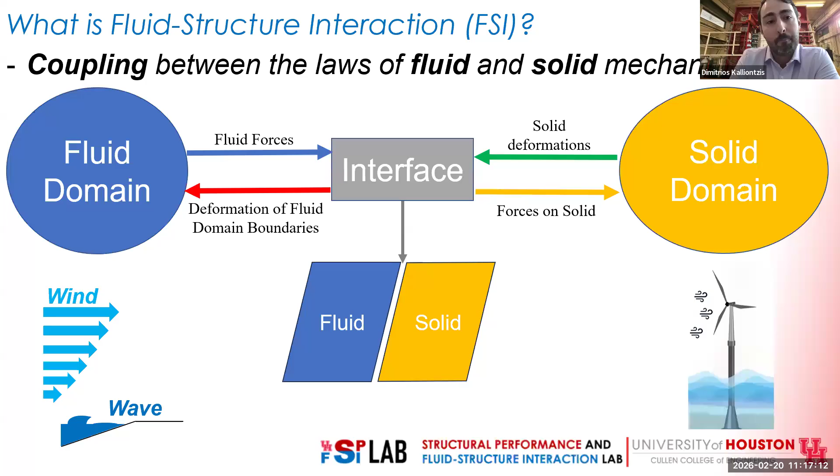Now, a lot of people would consider two types of fluid structure interaction. One is typically referred to as one-way, where basically the fluid domain gives information through the interface to the structure, but there's no two-way effect, so there's no feedback from the structural domain to the fluid. That is a general precept of what is a one-way FSI.

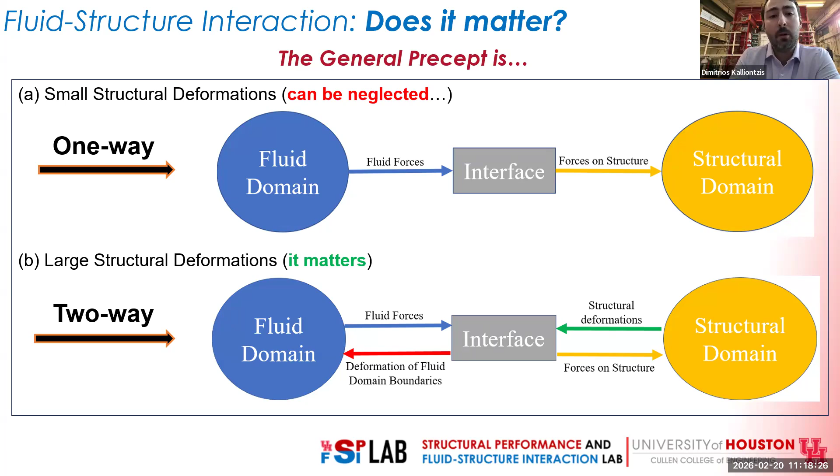It's typically used when we assume small structural deformations. You have a pretty stiff structure, whatever the structure is, and therefore you can in theory make this assumption that my structure is a bluff body, a rigid boundary. I don't have to transfer information to define my problem. And then when larger structural deformations occur, researchers would assume that this is a two-way phenomenon, where I do need to transfer information back and forth so that I can obtain an accurate estimate of the overall response of the coupled system. So these are just general assumptions.

Now, when it comes to fluid structure interaction, we consider several types of phase flow. So we have problems that we can call one-phase flow, where there's just a single fluid, let's say air, or just water, associated with a response.

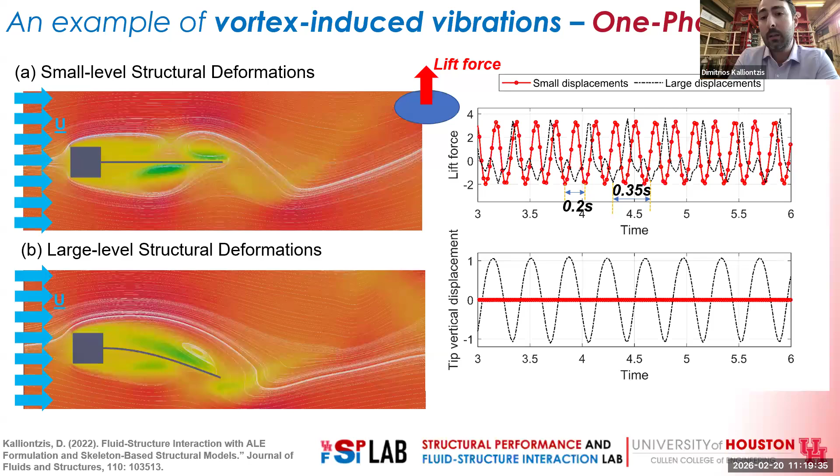I use an example of a vortex-induced vibration problem that is very common in literature, where you have cases with small structural deformations, the structure is stiff, the beam in this case is stiff, versus another case with large deformation. In a problem like this, which is a vortex-induced vibration, structural deformation will change the vortex shedding frequency. But in this problem, for example, the lift force that could be important in your analysis and design for the structure does not change significantly; it's still bounded within the same range. But if frequency is an important aspect of your design, then you should account for these effects.

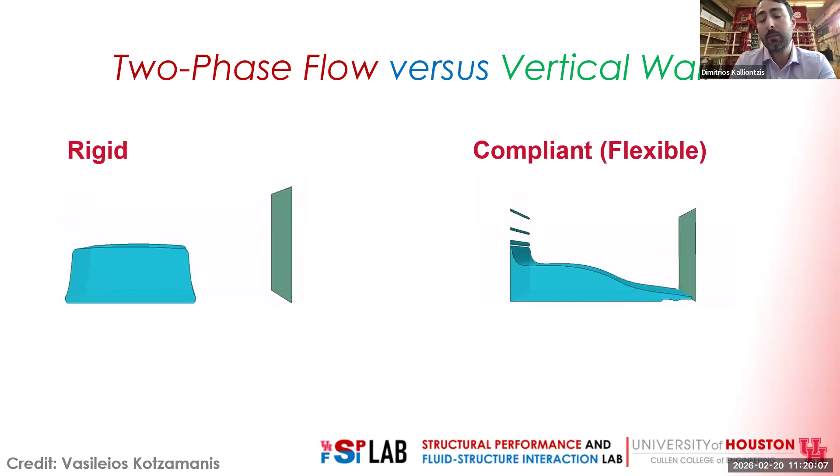There are also problems that involve two-phase flows, for example, when you have air and water. This is just a simple demonstration exaggerating the compliant or flexible structure, where you have a rigid structure on the left side. The flow basically impacts, rises on the structure, and then splashes back. In the other case, the motion of the structure, the deformation of the structure, does affect the flow. So this is a different class of problems, which I'm going to also talk a lot about today.

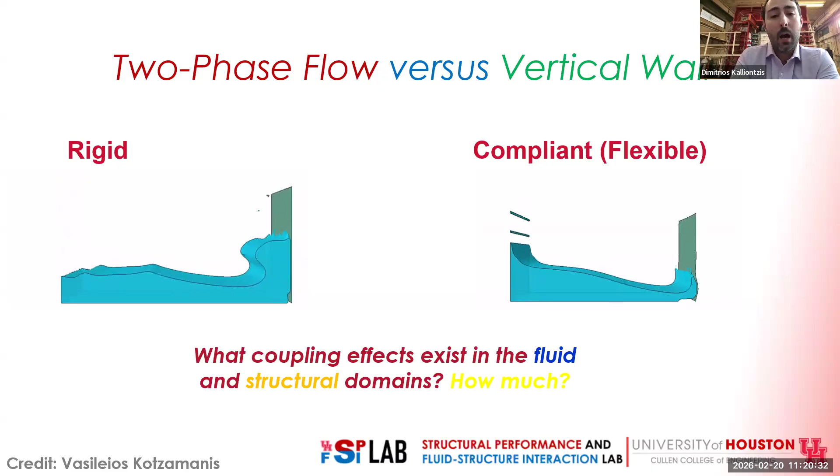We're going to mainly focus on two-phase flow problems. The key question in this type of problem is what coupling effects exist in the fluid and structural domain. As you know, many times we ask how important are they? And if they are important, by how much and in what terms? A more practical example of where this type of effect may manifest is elevated structures.

Especially at Florida and similarly in Texas, we are very much aware of the hurricane season, and that brings significant storm surge. After this type of events, we do see a lot of damage. In recent years, we have seen a lot of damage in these structures, which is why a lot of them are elevated one way or another.

So these structures, however, do experience sometimes significant wave impact on the first floor elevation because of the storm surge type that increases the free surface elevation significantly, so that waves can reach the first elevation.

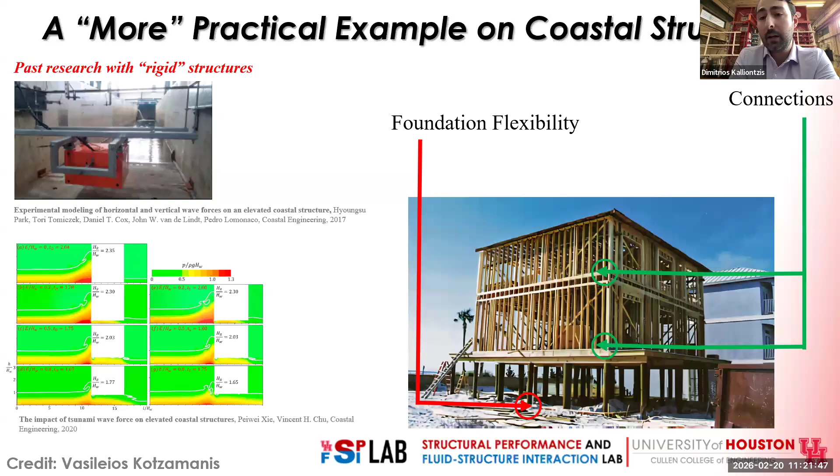And these structures are flexible inherently. They do have compliance that can come in several forms. One form is the foundation flexibility - how the piles are designed, what is the embedment length, what is the diameter of each pile, as well as the connections. The connection details can vary.

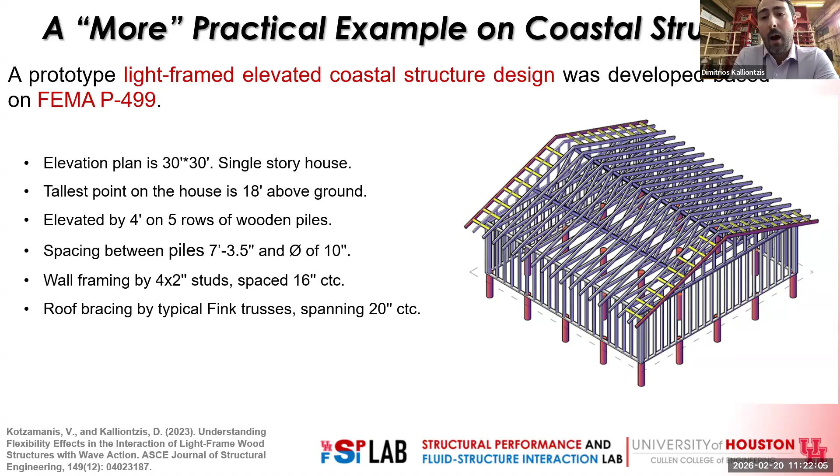To study these effects in this problem, we used a light frame elevated coastal structure, a typical design that was developed based on FEMA P 499, among other FEMA guidelines. We tried to see if waves hit the structure, and assuming different degrees of compliance and effects, how the behavior changes.

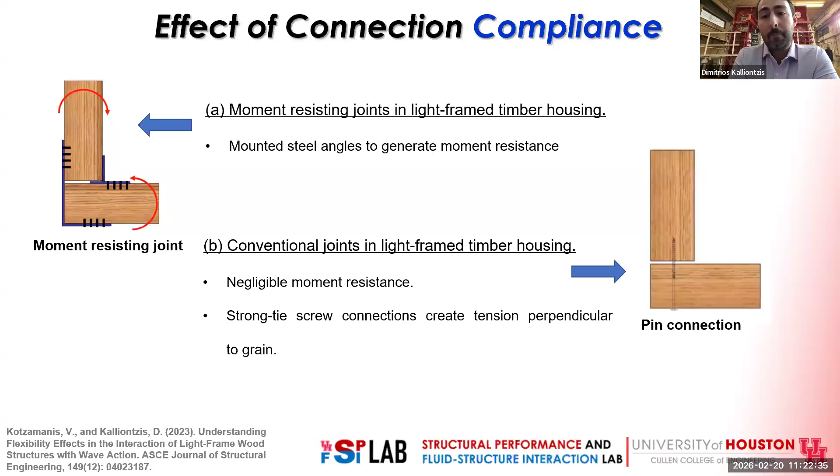So in order to incorporate the effect of connection compliance, we used two different types of connections. One is a moment connection - you can think about that as a more rigid or stiffer connection - versus a pin connection that is more flexible. The effect of soil compliance was also accounted for in this scenario.

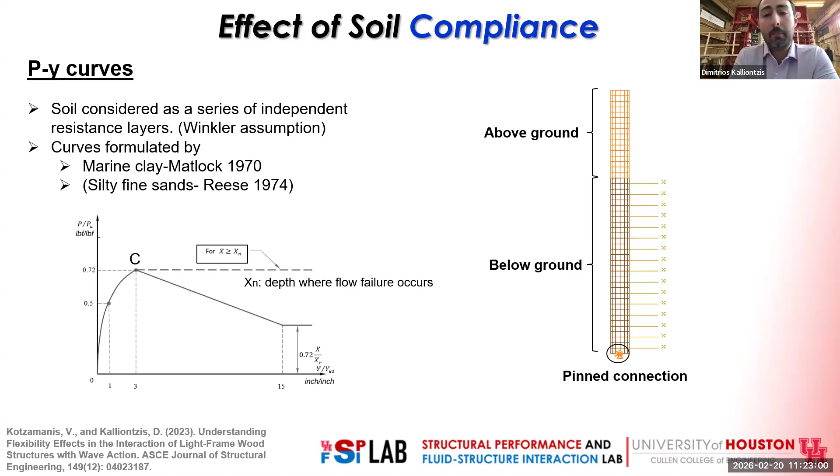I'm not a geotechnical engineer, so structural engineers for the most part would represent this behavior with P-Y springs. So we did, and we varied the pile design, as I will explain later, by changing the embedment and the pile dimension.

So in the first scenario where we accounted for the effect of connection compliance, what we observed basically is that compared to the rigid model, where the structure practically has the same geometry but it's just a bluff body, the deformations were of course more significant in the flexible structure, but also the contact forces the flexible structure experienced increased significantly in this scenario, by 55%.

In the meantime, the moment resisting connections also experienced slightly higher forces compared to the rigid model, but not as much, just by 7%. So the solution was much closer to the rigid body model.

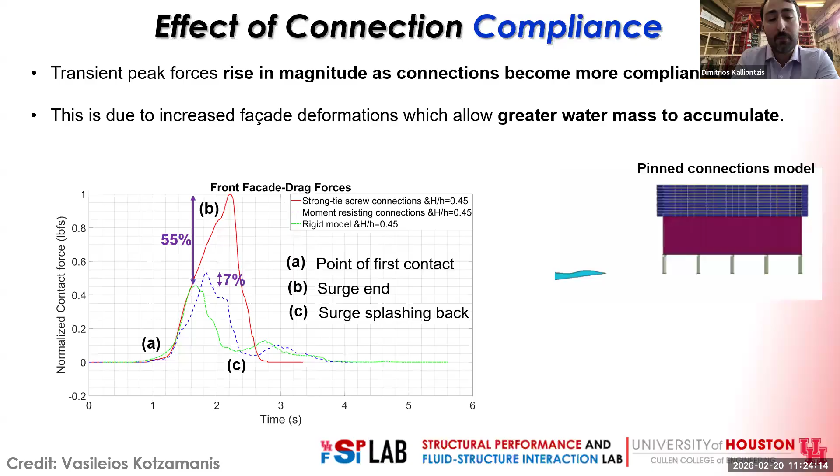What we also notice is when flexibility occurs in the structure, the interaction phenomenon is prolonged because the structure bends, so it allows significantly more hydrodynamic impulse to be concentrated in front of the structure and extends the impulse response, and also shifts the time where the maximum displacement and force occur.

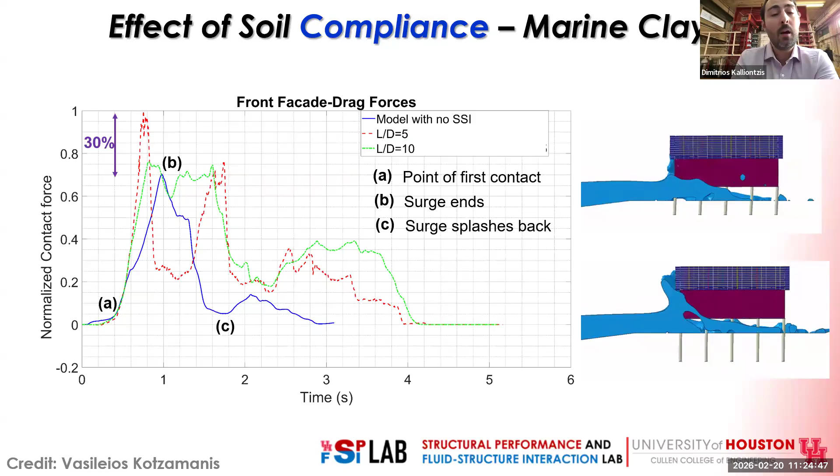In a similar fashion, we explored the effect of soil compliance by changing the design of the piles, basically by increasing or decreasing the embedment length of the piles, using embedment length to diameter ratios of 5 and 10. We also compared to the model with no soil effect. In this case, we did also observe an increase by 30% depending on the embedment length.

And this shows how the shapes of the response at maximum deformation were depicted by the model. I want you also to pay attention to the mode shapes that were observed, especially for the front elevation facade, because that is an important aspect that we decided needs further investigation.

Generally speaking, this type of shape, which in a way is similar to what you would expect in a simply supported beam, causes a deflection that will trap, in a way, more wave energy in front of the structure, which causes this increase in deflection and force.

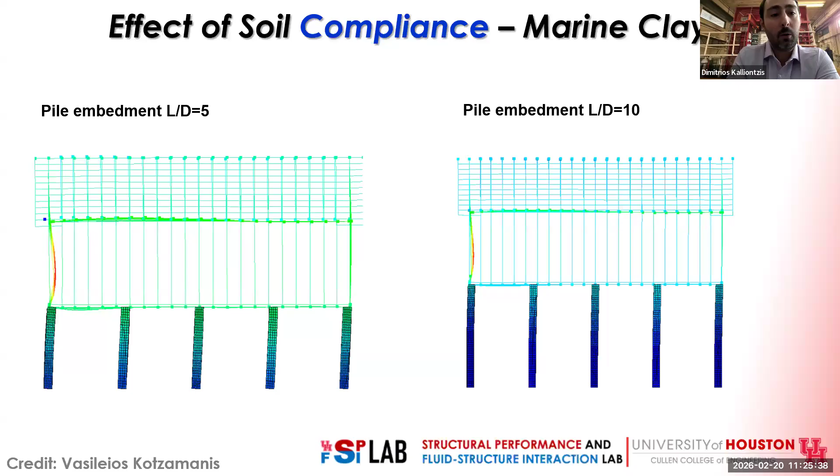So generally, in this small study, we did observe a prolonged hydrodynamic momentum transfer as a function of the compliance. We did observe a 50% increase in the peak force of the system. We did observe that soil compliance matters - so anyone who's a geotechnical engineer will be happy about that, in the sense that soil effects do matter in this case.

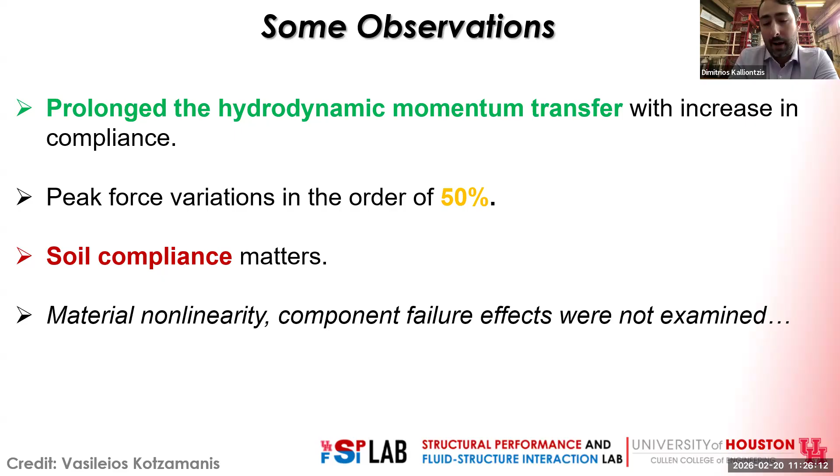Of course, this study was an initial study where we did not account for material nonlinearities, component failure effects, and other aspects that, of course, will play a role in the behavior.

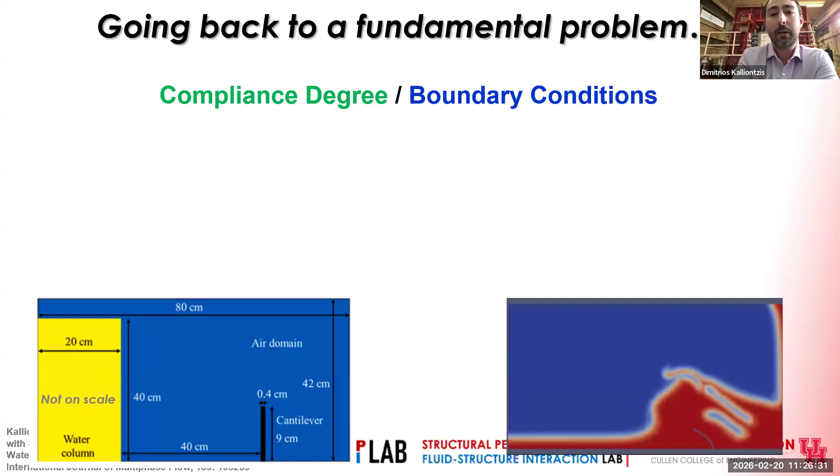Then after this study, we decided to go back to a more fundamental problem where we can study this compliance effect in more depth, but also incorporate another parameter of the boundary conditions. Boundary conditions were considered in our hypothesis very important because they do affect the stiffness, but they also affect the modal response.

A simple problem that could be used to study this effect is the dam break problem. It's a problem that has been studied significantly in the literature, used in validation of multi-phase flow models and structural models, and so on and so forth.

So we decided to use that popular problem in the study. Basically, as shown in the short video, it involves a water column that breaks—that's where the dam break problem gets its name—and then it hits a structure. In this case, the structure is a cantilever, with fixed boundary conditions at the bottom and no boundary conditions at the top. The structure deflects and interacts with the fluid.

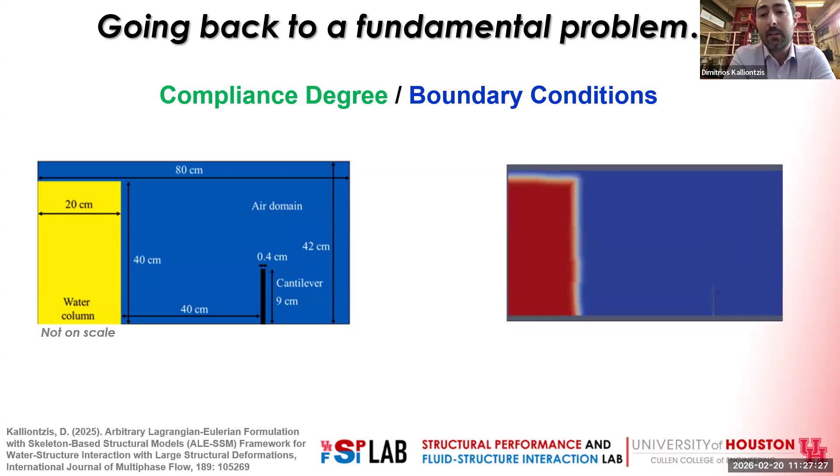Before we got there, we decided to develop a new formulation for this type of problem using what are called force-based beam column elements. Anyone who has used OpenSees in the past is probably familiar with this type of element. They're very popular in structural engineering because they reduce computational costs. You can generally simulate very complex forms of behavior with just a single force-based element.

We also decided to use an interface tracking method to simulate the fluid structure interface. That's a very important aspect in fluid structure interaction simulation because it defines how the two domains communicate. As you saw in the top part, that's a simulation from commercial software we did with a shell plate and a fluid domain flowing toward it. You can get what's called spurious fluid intrusion, which is not realistic—the fluid should interact with the structure, not penetrate it. This is a problem associated with how the interface is simulated.

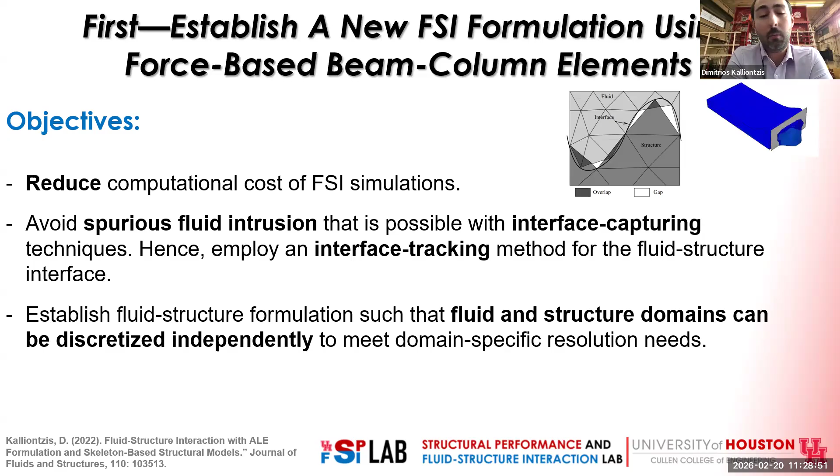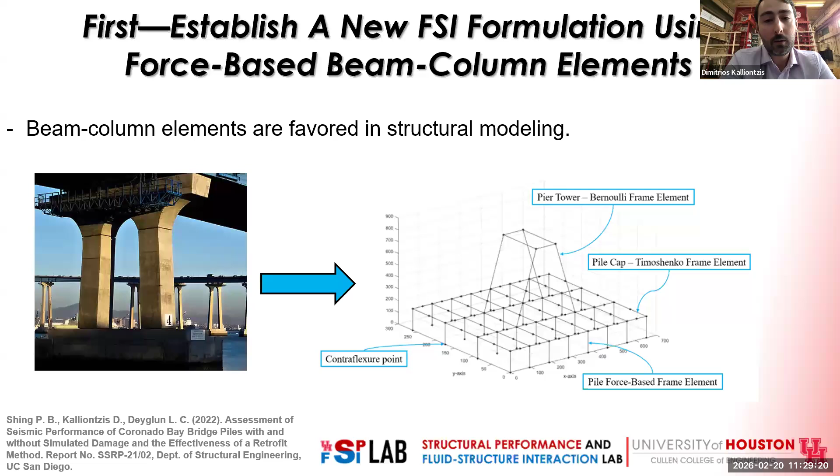Now, some background on beam column elements: they're favored in structural modeling because you can model big structures with just a few elements, and within a couple minutes get very reliable responses on big systems. This shows a bridge pier with a pile foundation system that was modeled as part of my postdoc at UC San Diego.

These elements are very simple—they have just two nodes, and you can vary the number of fiber sections depending on the problem of interest. There are many papers written on this topic. This is not a new element type; it's been out there for a while.

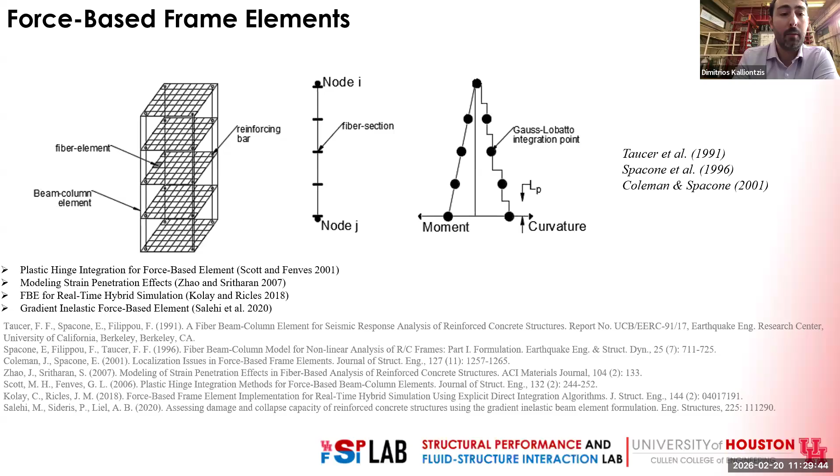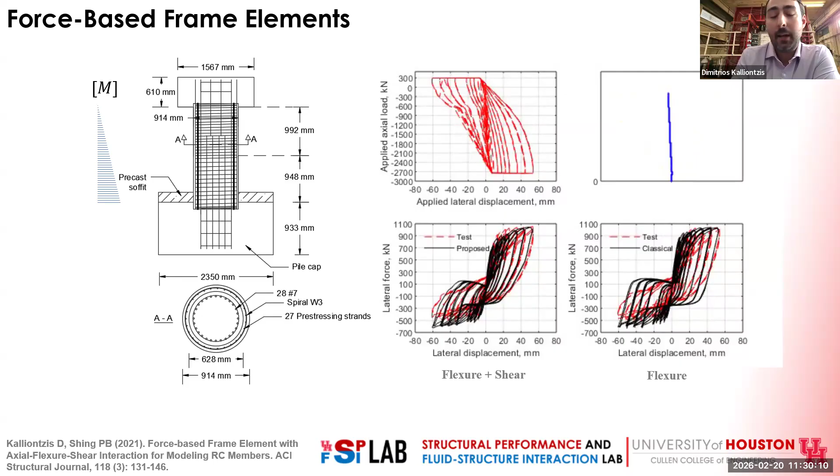For my part of the research, at some point I simulated axial load, flexure, shear interaction in a pre-stressed pile system using just a single element. You can see that just by using this type of element, the simulation can be very successful, even for very complicated responses that may take many, many days to run with more highly refined software.

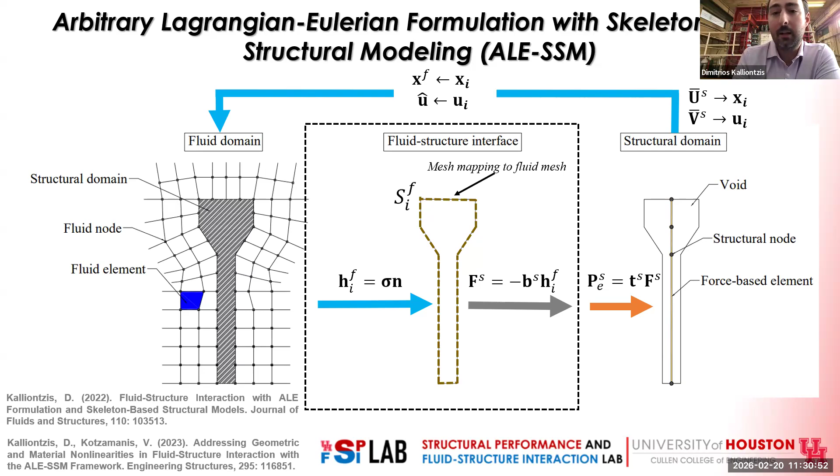The key in this type of problem is that since these elements are one-dimensional—they're line elements—how do you couple them with a multi-dimensional fluid domain? That's the key of what we call the arbitrary Lagrangian Eulerian formulation with skeleton-based structural modeling, which we developed to achieve this interface model. This accounts for an interface modeled in compatible form with the force-based element, allowing the use of these elements.

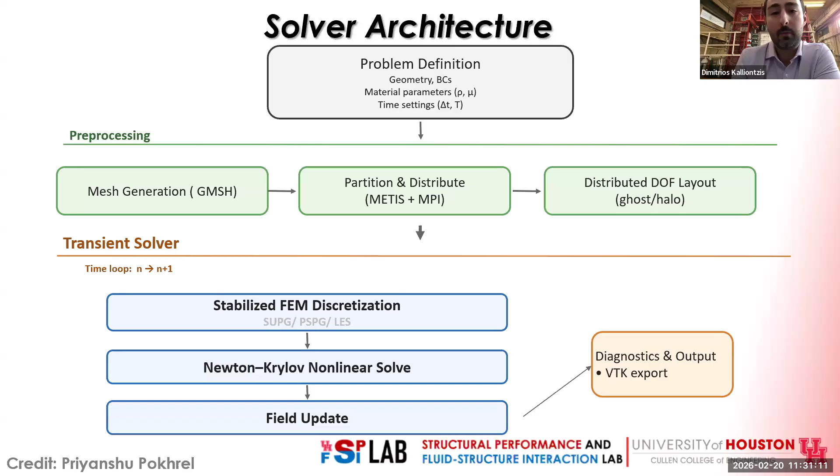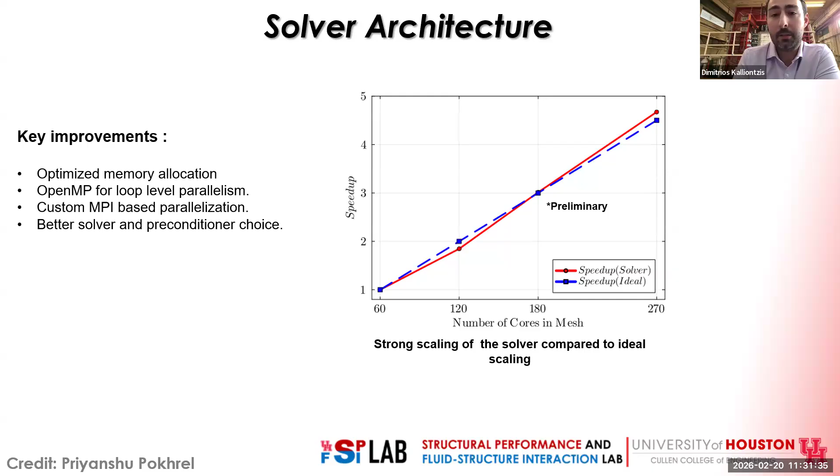For those who don't know, Julia is a relatively new platform, much newer than Python for example. So we had to do some more basic simulations to get data on the speedup of the code. Of course, we did a lot of benchmarking—this shows benchmarking on turbulent flow correlations that my student has done, and many other studies.

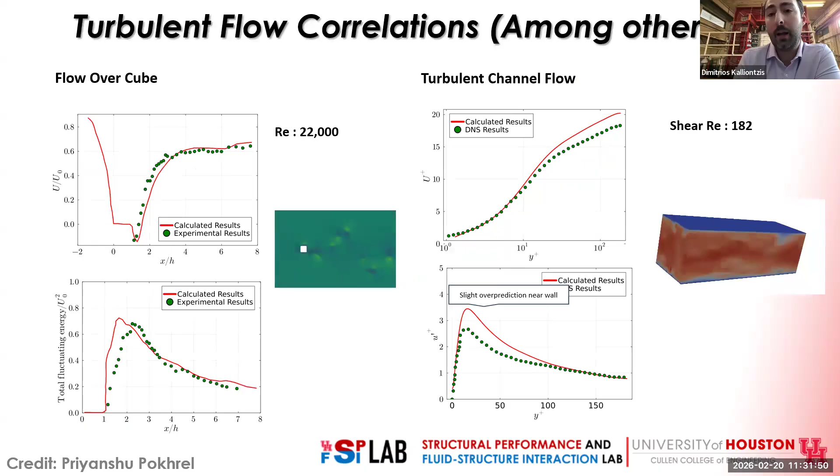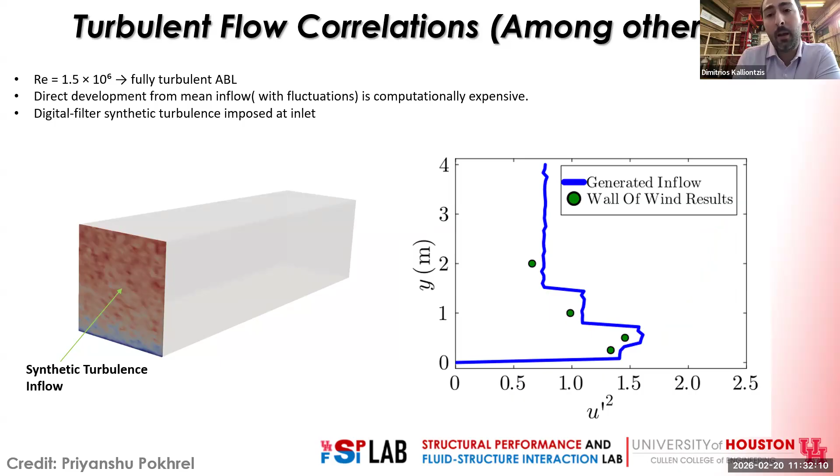So to look at how our software works—this is ongoing work my student has been doing on the wall of wind problem using this platform. I should say platform, not software, because it's not commercial, it's in-house developed. With that, I'll go back to the problem that we studied.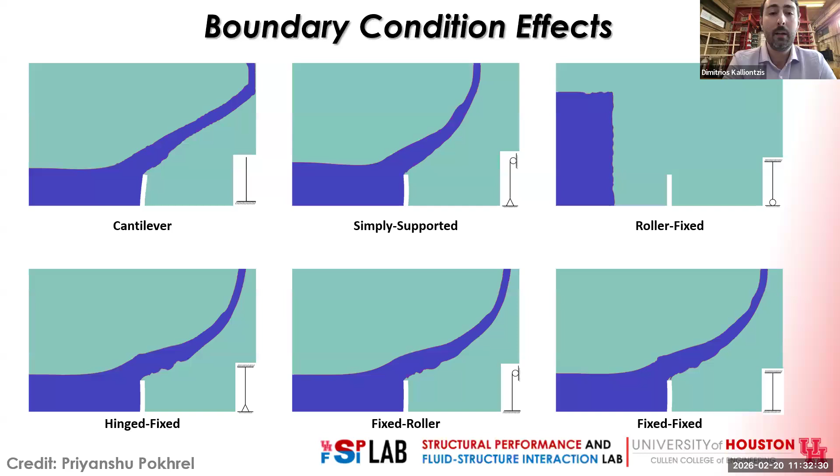We decided, as I said, to vary not only the stiffness in the simple problem but also the boundary conditions as much as we could. The possibilities here are limitless, but we decided to focus on six basic conditions, mainly related to cantilever, simply supported, combinations of roller with a fixed boundary, and a fixed boundary. So what did we observe?

We did observe that, as someone would expect, the more flexible, the more compliant the structure is, the larger the deformations. This is an expected response.

But when you look at the horizontal forces, that is a very interesting finding, because based on the initial findings we had, the more flexible, the larger the forces. However, here the boundary condition is significant. For example, the cantilever experienced the highest lateral drift, but it also experienced the lower horizontal force. So this is in a way counterintuitive based on what we saw in the beginning, but in fact it's because of the boundary condition effect.

When you have a cantilever structure, in a way the structure deflects so that it creates a pathway for the flow of the fluid to leave the structure and therefore experience reduced forces.

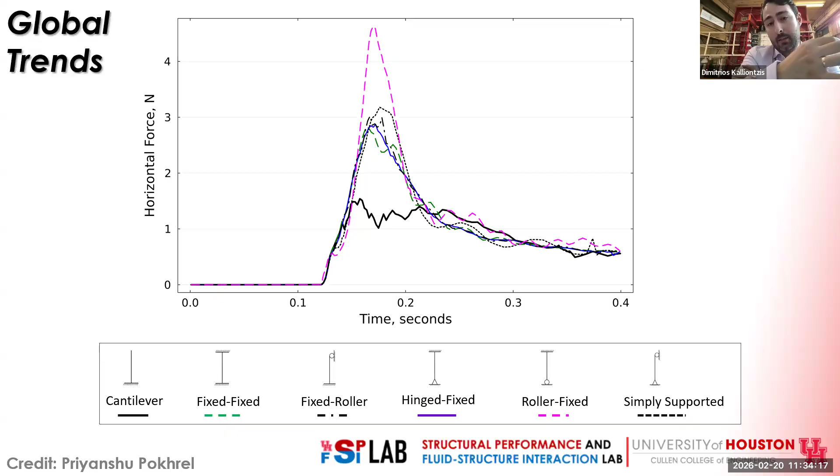When you have a simply supported condition or a fixed condition, even though you may have significant compliance within the mechanical properties of the structure, you in a way trap the wave momentum so that you end up with much higher horizontal force. In fact, the highest force was attributed to the roller-fixed condition, where the roller is placed at the bottom. As you can imagine, the resultant of the wave force is located near the bottom part of the structure, and so it results in much higher forces.

After that, we investigated other aspects, such as the sensitivity to stiffness. As you increase the stiffness, all the results converge to the same solution, as expected.

This is the peak vertical force that we observed in this case. Interestingly, when you have a roller fixed at the top and roller support at the bottom, the structure experiences a vertical force that decreases with the stiffness.

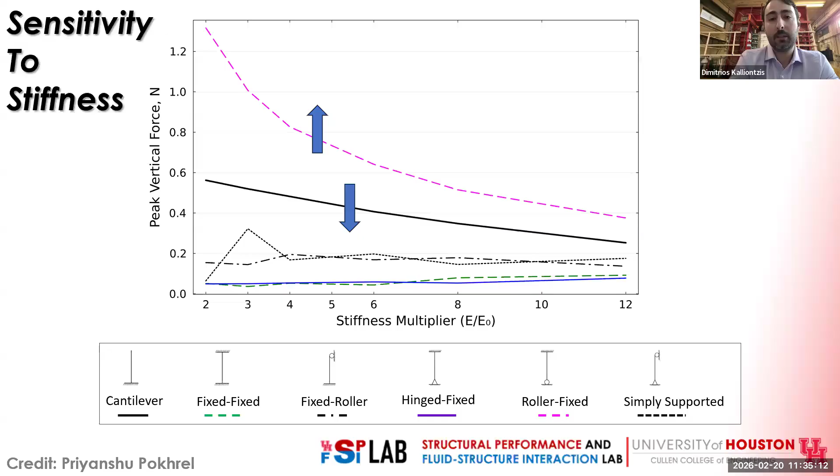When you have a cantilever, the structure, as it deflects, basically hosts the fluid on top so that it experiences a vertical downward force. So in both cases, there are some vertical forces in the structure depending on the level of deformations.

Then we also looked at some aspects of the fluid kinetic energy, how it varies in front of the structure, and whether it matters. Most structures experience very similar responses.

The cantilever was a little bit different, with some prolonged fluid kinetic energy, mainly because it created this pathway on top of it, allowing more kinetic energy to stay within the neighboring elements of the structure for longer periods.

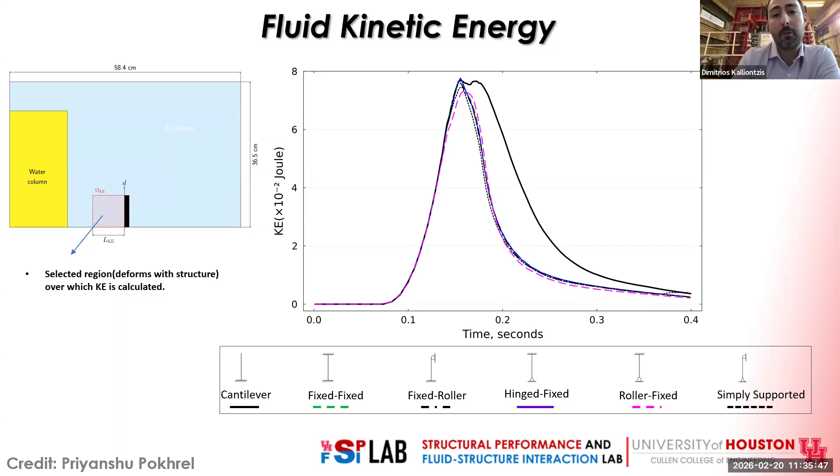The modal analysis that we performed in terms of force, and we also have results for displacement, showed that, depending on the boundary conditions, you have different modal participation in the system.

If you look at the right side, which is basically the force exerted by the fluid on the structure, fluid forces, as you can imagine, can be scattered significantly. The profiles of pressure they generate are highly nonlinear, and that also reflects on the modes they try to excite.

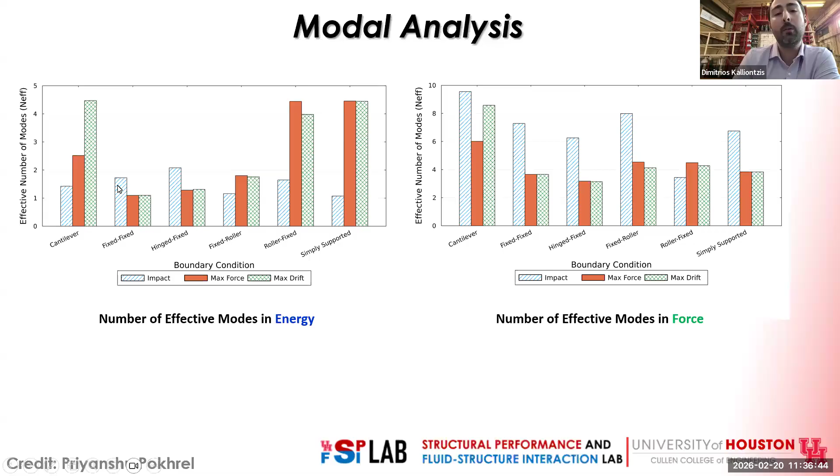The impact phase, for example, shown in blue, tries to excite a significant number of modes. The structure typically responds within the first two modes at impact, and then depending on the level of deformation, this participation of modes may increase.

One other aspect I'm also very happy about is that this framework we developed was then utilized by the NHERI Lehigh facility in order to perform real-time hybrid simulation. The collaborator is Dr. Jim Ricles and the student Faisal Nissar from Lehigh, who helped me and then led this work in order to integrate the two frameworks.

Of course, when it comes to fluid structure interaction, anyone who has done CFD analysis realizes that it's very time consuming. So the key question is how can you even consider real-time hybrid simulation?

Well, we were able to achieve that through several aspects. One was related to the ALE-SSM and how it is formulated, which allows, through force-based elements with very few nodes, to achieve real-time hybrid simulation by training the fluid forces through a neural network. That's the key that allowed this behavior.

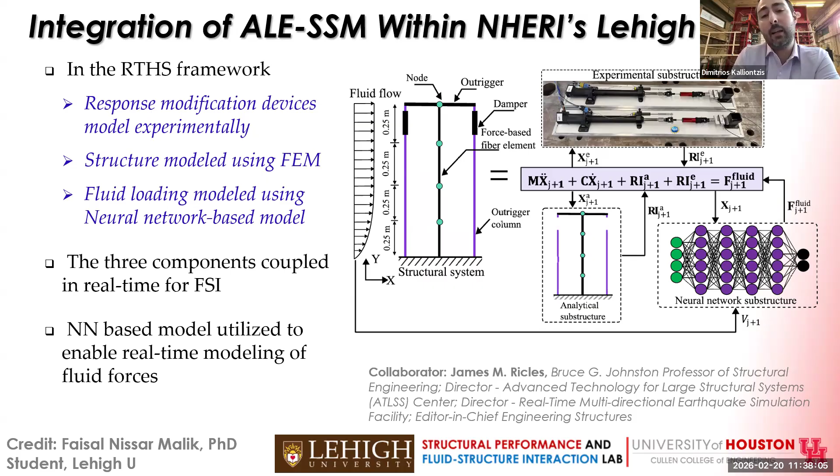In this case, we had the benchmark problem with one cantilever structure and a damper system that was represented experimentally. These are just some results of this problem. In this case, we accounted for one-phase flows.

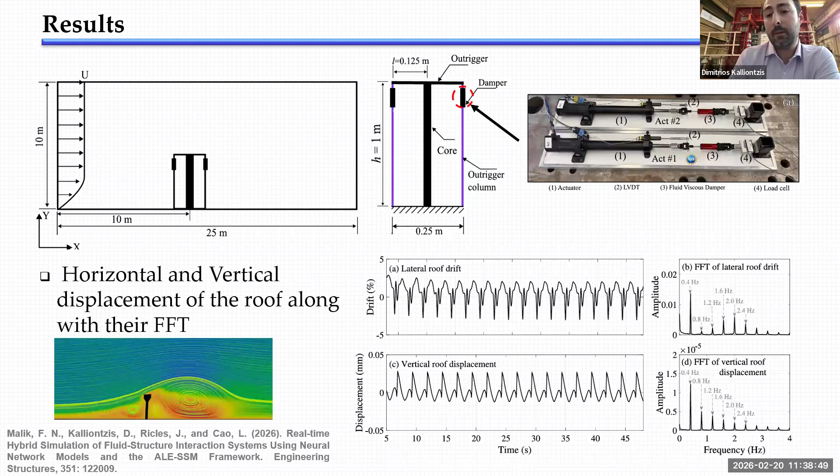We just wanted to do a first benchmark, but the significance of this problem, even though it is relatively simple, does result in excitations that span significant frequency ranges, which was also an aspect we wanted to verify works through a real-time hybrid simulation, because in reality, if you are trying to simulate either a wind problem or a wave structure interaction problem, you should expect a significant range of frequencies. So the question was, can a system like that in real time capture that?

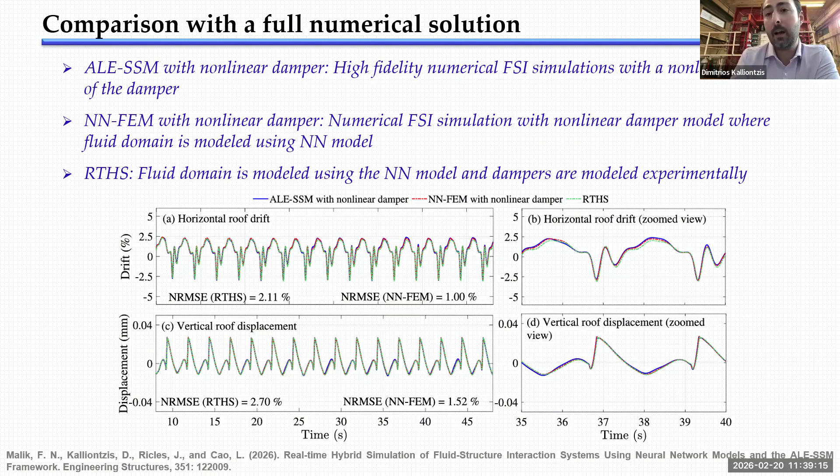The simulation showed that the original full fluid structure interaction solution matched excellently to the real-time hybrid simulation framework. And I want to emphasize that this happened in real time. It's a real-time hybrid simulation. It's one of the few times RTHS has been done for this problem, and we plan to continue this line of work. That was just a parenthesis showing how our framework can be extended to other usages.

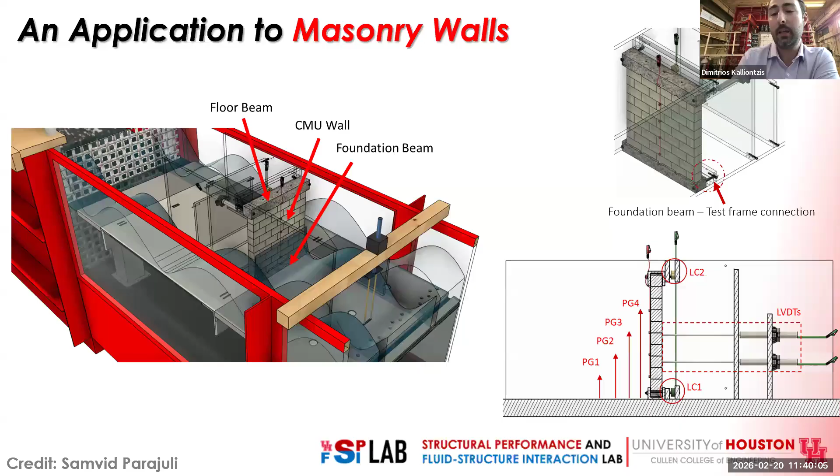But one aspect I should say is that a lot of researchers will generally look at numerical results, and the numerical results may say part of the truth. So we decided to also explain and investigate this behavior through an experimental setup. In this case, we decided to look at masonry walls that generally have flexibility inherent to them, and try to see whether if we run a wave flume test in our lab we would see similar results, or whether all the walls in our test setup would behave the same.

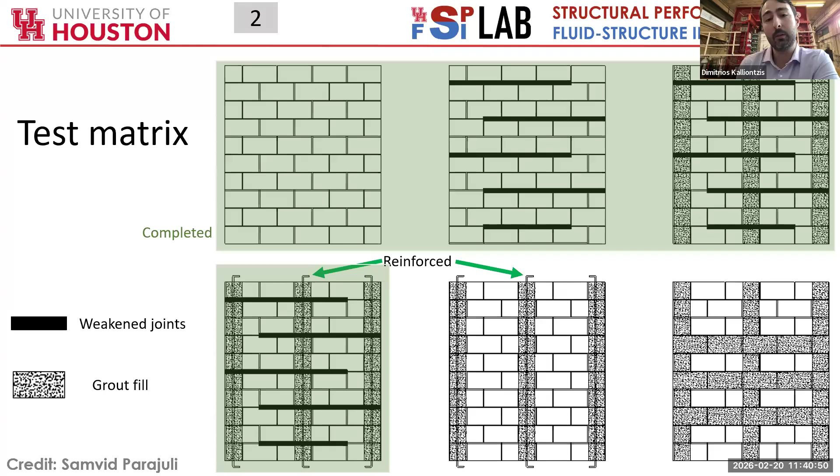So we tried to vary the compliance from one wall to another. We had, for example, walls that are ungrouted with some weaknesses in the mortar joints that introduce additional flexibilities. This type of experimental model also replicates field conditions where, after many years, walls located in coastal areas experience some erosion in the mortar joints. We also accounted for some walls that had grout with weaknesses in the mortar joints, along with reinforcement in the grout itself.

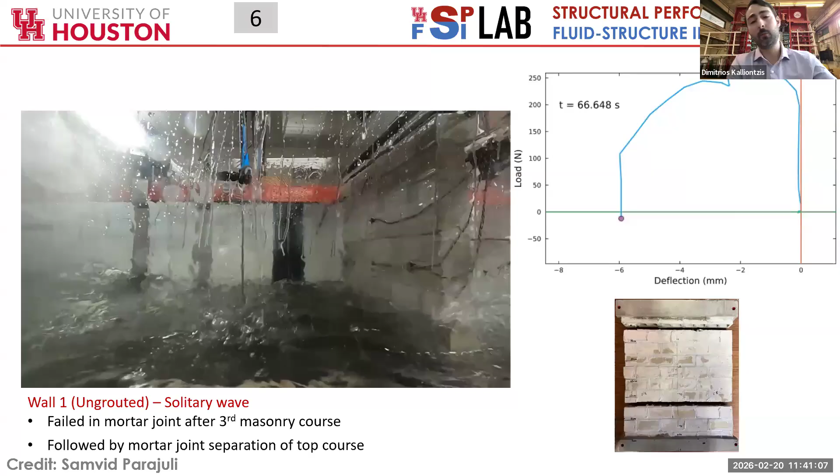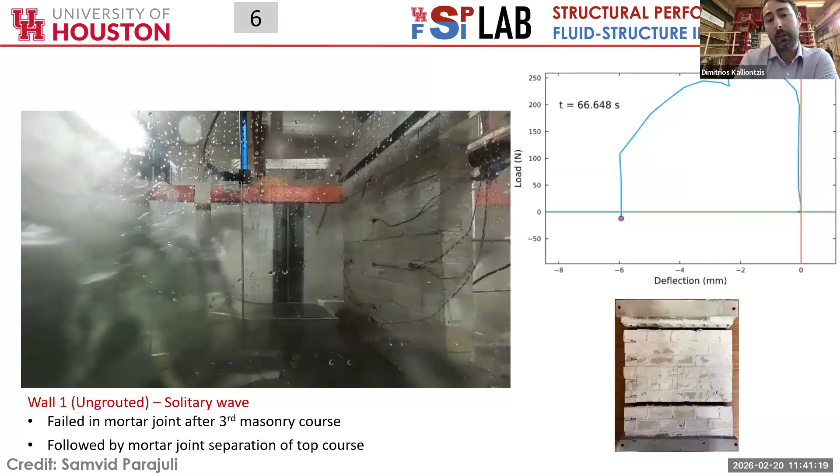This is just a video from our test for one of the wave scenarios we explored. This was basically the failure of wall one that we tested. This wall, as you see at the bottom of the slide, experienced a mortar joint failure at about a quarter height from the top, and at the same time the top joint also failed.

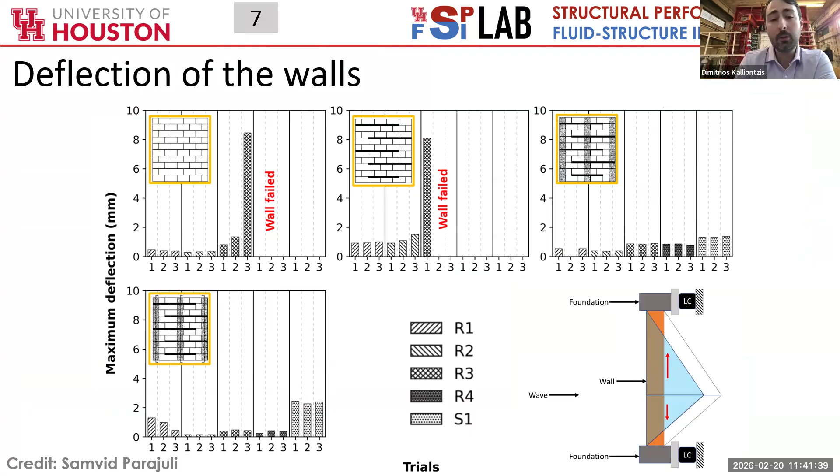Then we looked at the deformations of these walls. The first two walls, more flexible, experienced much higher deformations. The other two walls, strengthened through grouting and reinforcement, experienced much lower deflections. Interestingly, we compared the average impulse responses that reflect the forces experienced in these walls, and we noticed that different walls, as a function of stiffness, experience different forces. In this scenario, you can think of the wall's mode of response as closer, though not exactly the same, to a simply supported beam behavior. So we would expect higher forces in the stiffer cases, which is exactly what we observe here.

This is an ongoing project, so I don't have more results to show, but overall it provides a first indication that our original assumption about the boundary conditions and compliance effects does hold, in both numerics and experiments.

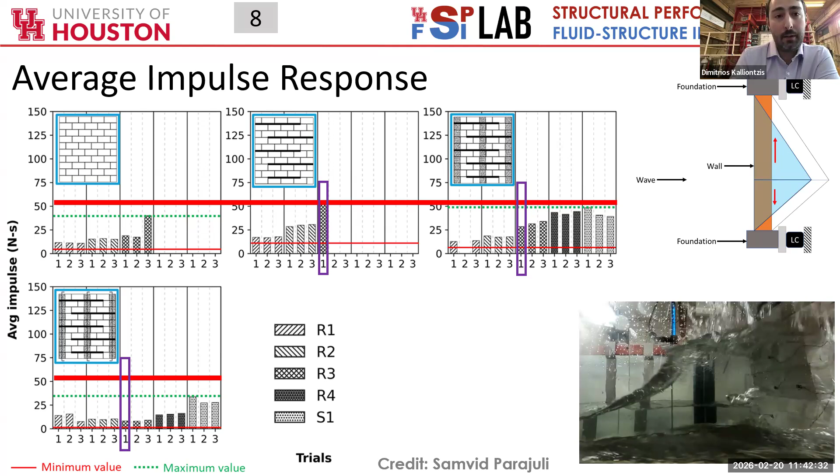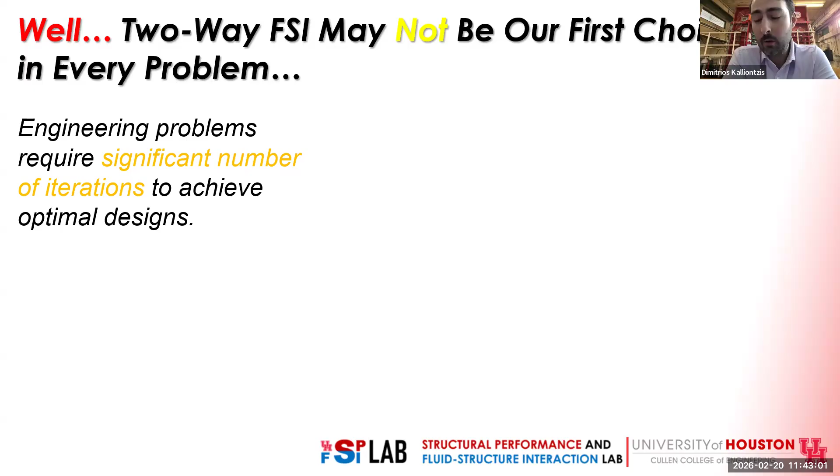So far, I have been trying to convince you that two-way FSI is very important, right? I think many of you have realized that so far. But now I'm going to tell you that two-way FSI may not be the first choice in every single problem we solve. The reason is because engineering problems require a significant number of iterations to achieve optimal designs, and this is the case for many fields.

One field is wave energy, where the first thing you want to do when designing a wave energy converter is not to rely on a very high fidelity, rigorous two-way FSI formulation. What you want is the ability to perform many simulations to end up with a converged optimal design. Then on that specific design, you may perform refinements that may require additional FSI. So generally speaking, in a case like the one we did in our laboratory for a wave energy converter design, you want to start with simpler, lower fidelity, or medium fidelity, methods.

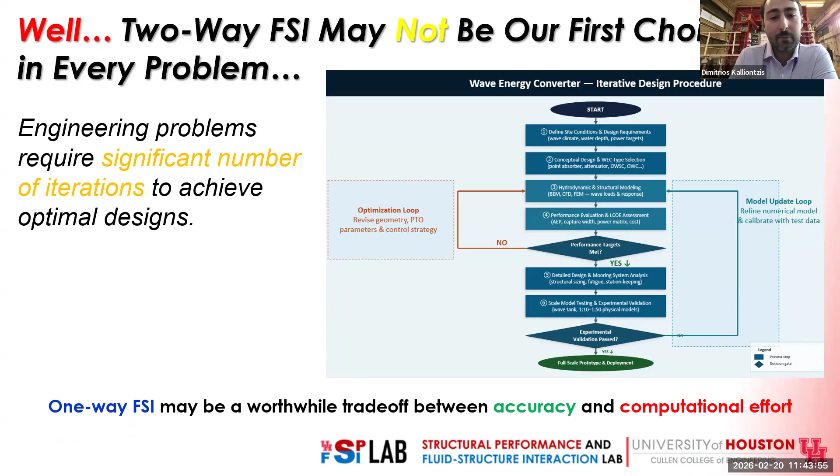So one-way FSI, therefore, may be a worthwhile trade-off between accuracy and computational effort in these scenarios.

Many of you may not be familiar with wave energy converters. In fact, we don't have many field applications in the US, not yet. But there are systems that basically try to harvest wave energy. Some of them may be located near existing structures, like ports or platforms in the ocean, or they may just be mobile, standalone structures or arrays in different offshore areas. So there are different types of them, and this presents some of them.

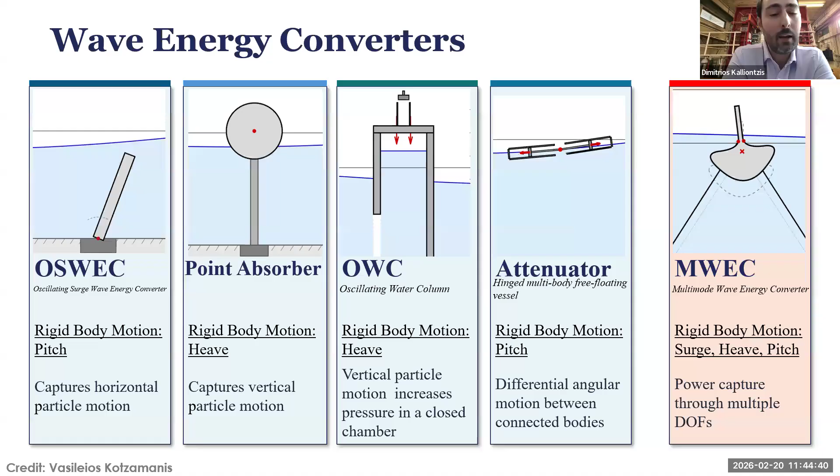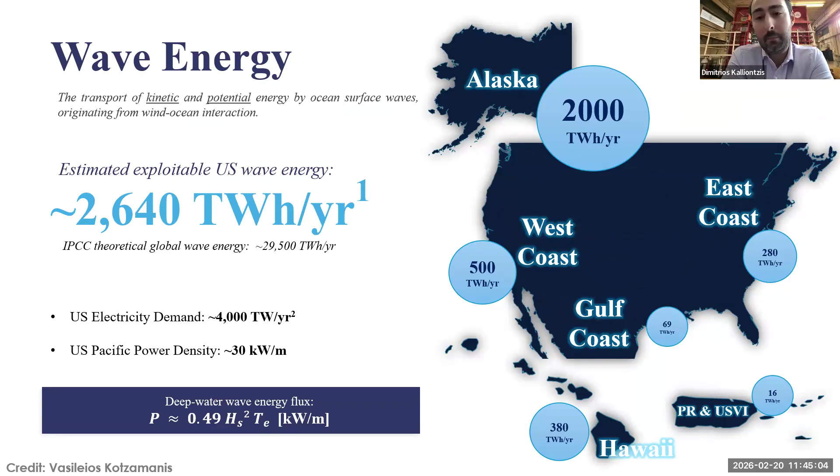My research has focused on what we call the MWEC, or multi-mode wave energy converter system, that I will explain in a bit. Wave energy is a highly untapped form of energy that we have in the United States and around the world. In fact, if we were able to harness all this energy, we would be able to cover the energy demands in many areas of the country.

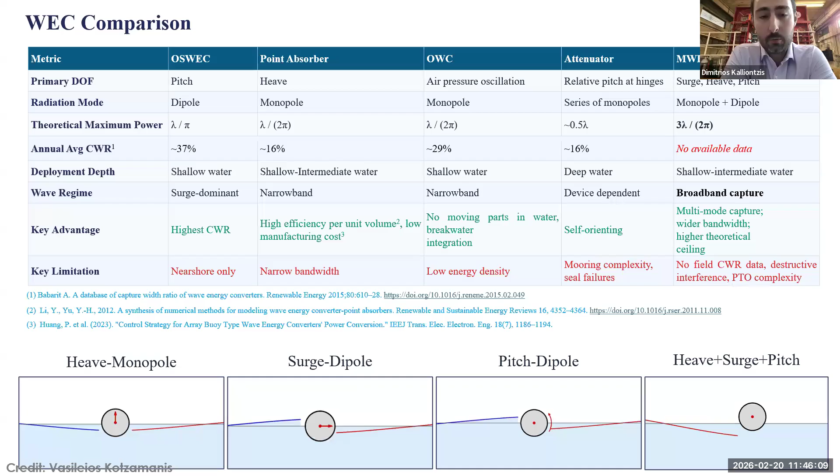Now, the key about wave energy devices is that they try to have a specific primary degree of freedom mode that they want to be excited about. Some of them follow pitch, some use heave, some use other methodologies, and there are other modes as well that could be accounted for. But the one we are trying to investigate in this study was what we call the multi-mode WEC, which in a way is an under-investigated technology that basically tries to harness energy from all three modes: heave, surge, and pitch. The theoretical capability, and why we're investigating this, is that in theory it can achieve threefold energy capture compared to other WECs that rely on a single mode.

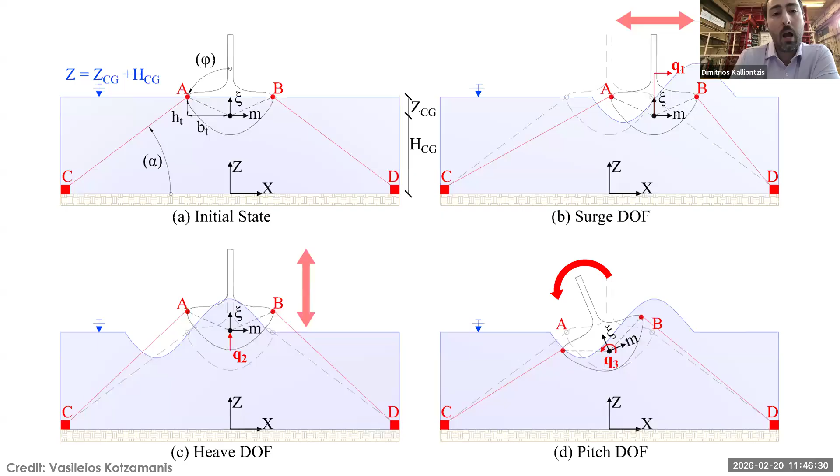So in an MWEC, you have all these three modes: surge, heave, and pitch. Surge is basically the horizontal motion, heave is the vertical motion, and pitch is the rotational motion. All of this is being investigated in this case.

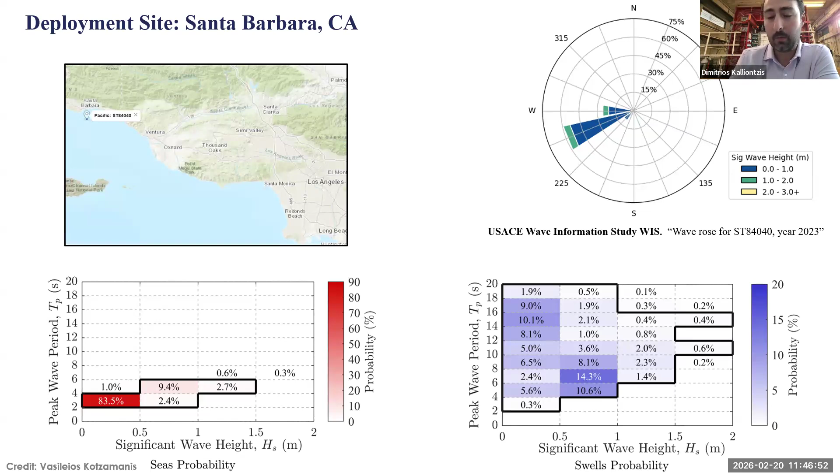Of course, before we get there, we need to identify a deployment site where we're going to deploy this device. Our study was very specifically aligned with a specific site. We wanted to have realistic wave field results in order to study this behavior, so we selected the site at Santa Barbara to do the study.

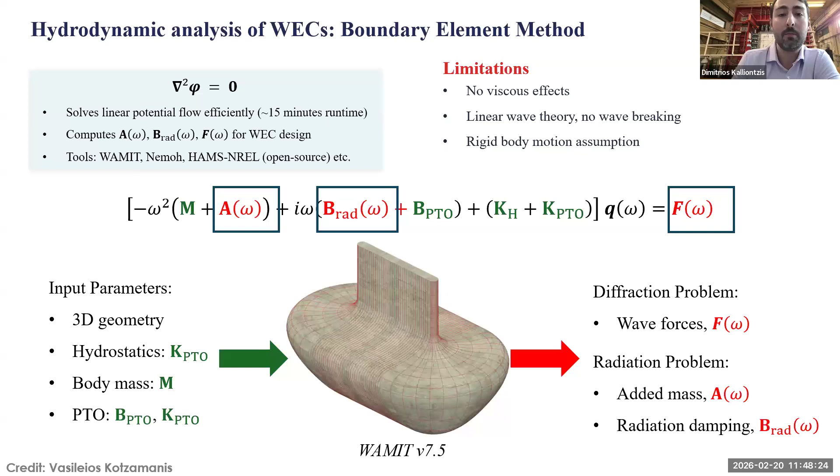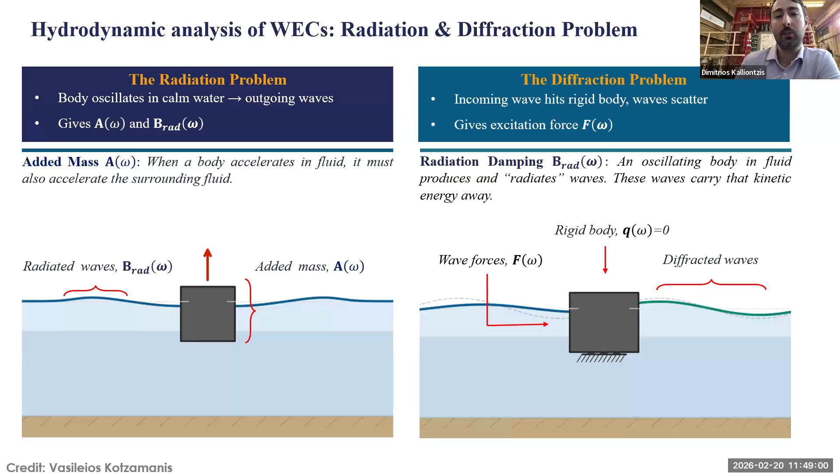So the radiation problem basically is that when a body accelerates in fluid, it must also accelerate the surrounding fluid. The equation of motion brings this added mass effect into it, which accounts for this fluid structure interaction effect. The second effect relates to damping—but that is not viscous damping that we learn in structural dynamics. It has nothing to do with deformations of the structure, but it has to do with an oscillating body which produces and radiates waves. As the body oscillates, some of the energy is lost through radiation, which results in a damping effect on the structure.

The methodology we followed for this approach—and generally I think many others may also use similar approaches—was mass optimization of the MWEC. Since we do not have a lot of research on MWEC studies, only just a few papers out there on this topic, we had to optimize and define an optimal shape.

Then study modal coupling effects. This is a topic that, if MWEC studies have been covered in the literature a little bit, modal coupling effects have not been covered at all, I would say.

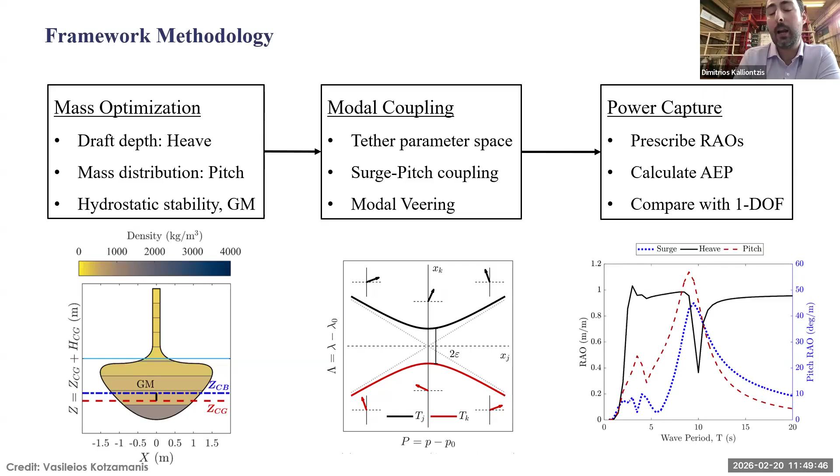And then the power capture, using the hydrodynamic analysis results. What is the power capture in the system? In this type of cases, we have to also ensure hydrostatic stability of the system without having to rely on a PTO to provide that. So we had to optimize our structure for both, by tuning both the periods to pitch and heave, but also try to ensure optimized density for hydrostatic stability.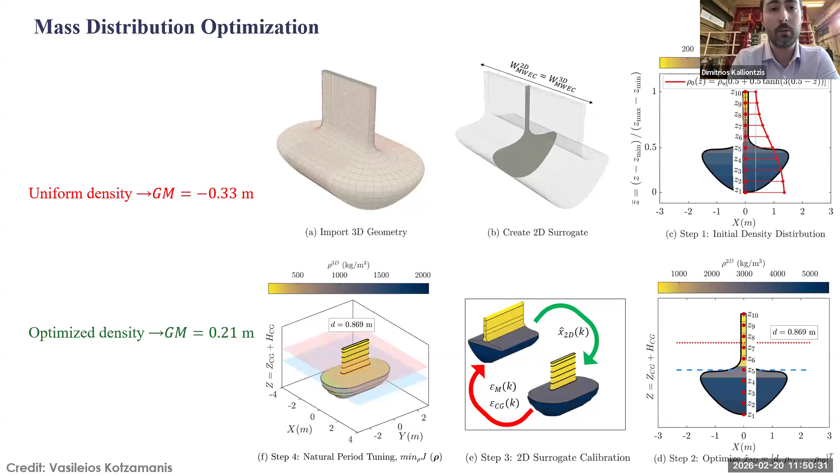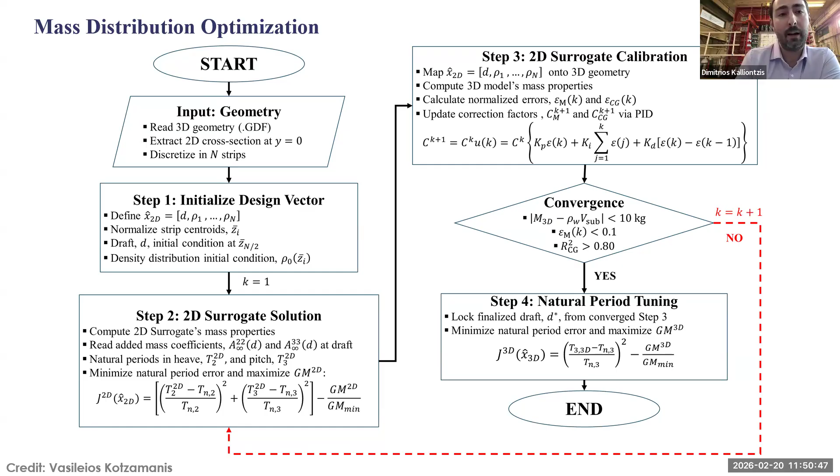To do that, we did use the surrogate model approach. Machine learning approaches in general are very important, very handy in coming up with a fast and quick solution for mass distribution of WEC systems is what we found. This is just an algorithm that we developed for the mass distribution optimization. I don't want to go into many details, but it provides fast and quick solutions to this problem.

One aspect that I cannot go into many details on, but I think is very important in relation to MWEC, is modal coupling and modal veering effects. By modal veering, basically, we mean a case where two modes may veer away instead of crossing. These are, in a way, dangerous areas to design, because if you design near those regions, small variations in the tolerance of your design may actually give you a response that was significantly off from what you expected.

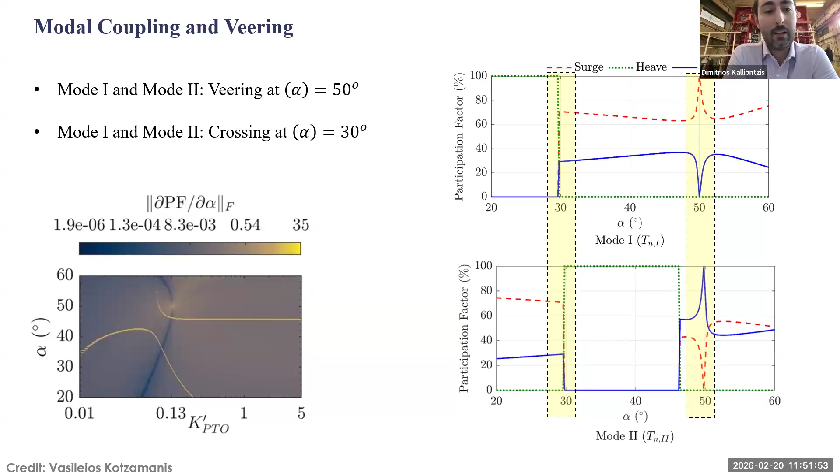So because of that, I think this is a very important area to identify. It was, in fact, the first time that someone did research on this topic for MWEC systems. Basically, what you practically need to know is don't design near these areas that may cause veering effects. If you design elsewhere, your MWEC will behave fine.

Another aspect at the end is power capture, and I think an important observation we have made through our analysis is the so-called destructive interference. You would think that each single mode in the structure, in the MWEC, will try to absorb energy. Well, coupling effects result in these negative energy absorptions. In other words, destructive interference in power capture.

So we did observe these effects, even though they were not that important, but mainly introduced by pitch and surge modes. Eventually, we did find that these do not manifest themselves in the overall global power capture of the system, but they do occur. And this has to do, again, with modal coupling effects.

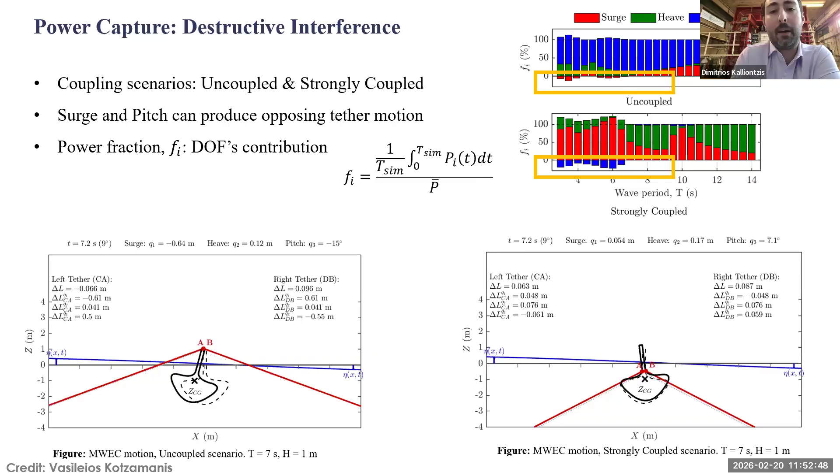Finally, what we observed when we did the annual energy production with reference to our site was that basically MWECs are able to distribute the energy absorption over a bandwidth of wave excitations versus a point absorber, which, if designed passively, will mainly be really effective within a very specific wave period, but then its energy absorption will diminish for other regions around.

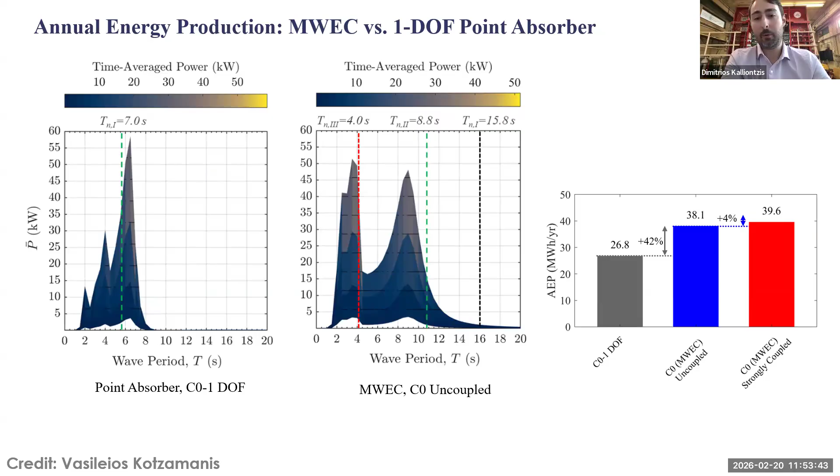Generally, in this theoretical investigation, we found that the increase in power capture is 42% higher compared to a point absorber. I think this is an important theoretical basis for further investigating MWECs in the future.

Finally, this is just my teaser. Do you still think that this does not matter for concrete? I was asked not to talk about concrete because part of my research is looking at concrete. And in fact, we have a DOE project that was awarded in 2024, and we expect to start soon on design of WEC hulls using ultra high performance concrete.

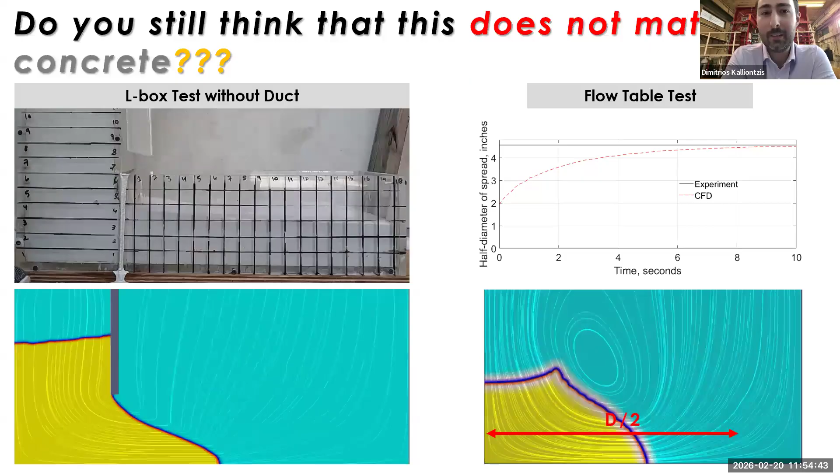Well, concrete is a fluid, right? Before it becomes a solid, it is a fluid and has characteristics that through the fresh behavior must be studied. I believe that fluid structure interaction also matters when you especially include fibers in the fluid. When you include fibers in the UHPC, for example, your flow behavior changes. We know that, but we have not studied that to the degree that we should. So even though this is not a talk about concrete, fluid structure interaction can matter for concrete.

Some acknowledgements. The wave energy investigation was performed through a research project that was provided to us through the MSI program, through the WPTO office of DOE, and the wave masonry interactions were performed using funding from the Concrete Masonry Checkoff program through the Department of Commerce.

So with that, I want to conclude my talk and see if there are any questions.